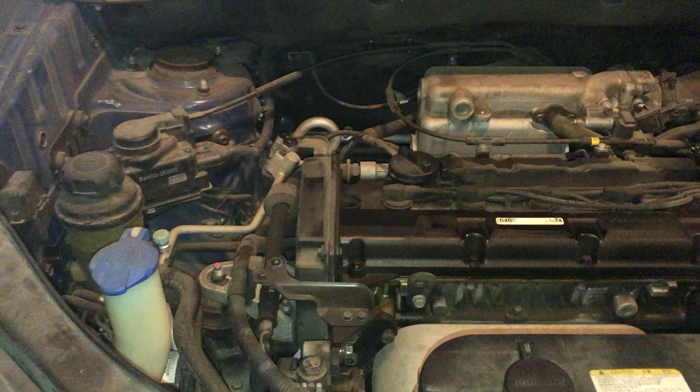I just wanted to make a video to show how the belts work on an 06 Tucson, since I couldn't find any on YouTube when I started trying to change mine. I'm not a mechanic or an expert, just know enough to get myself in trouble. Let me show you what I found.

So this is the engine, the 4-cylinder Tucson with the top off, which makes it easier to see the belts. There are 3 belts: the power steering pump there, down there you can see the alternator, and assuming that's the water pump. There's a drive thing that comes off the transmission, and the AC one is way in the back, the hardest one to get to. That's the one I had to replace.

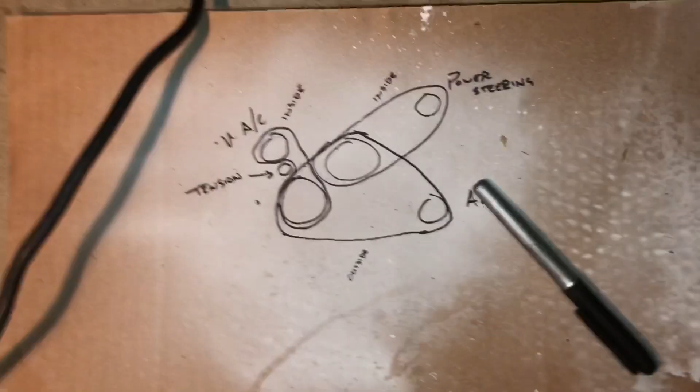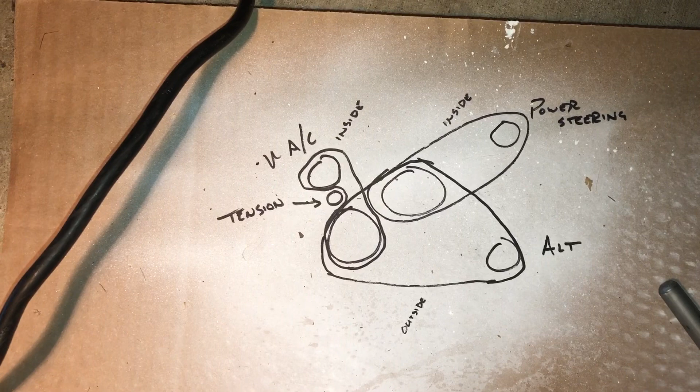All the videos I've seen suggest you make a diagram of the belts before you take them off. It's definitely a good idea to figure out how these things work. There are 3 belts, like I said. The 2 that go over the alternator and the power steering are both stretch belts, so you need a stretch tool to get those on and off. The one that goes to the AC is a standard one with a tension pulley.

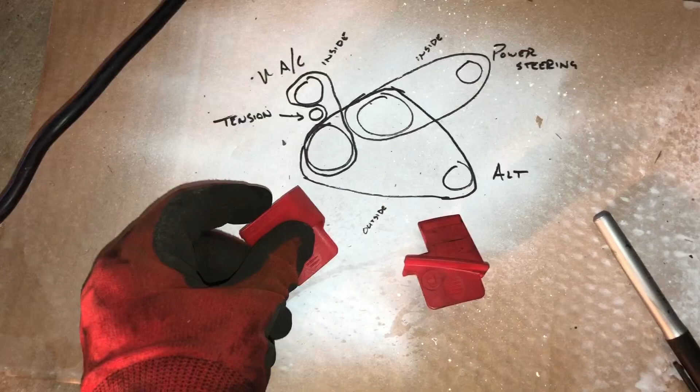As far as the stretch belts go, there's a tool that AutoZone has. It did not work for me. This one that O'Reilly has worked much better for me. You use this to slide it on, and this to slide it off. That's the one I'd say to use.

Let me show you on the side here. So you can take the top of the engine off, but I guess you don't need to - you can still get to things because you really just need to go on the side. You want to take off the passenger front tire, and behind that there's an access panel with 4 10mm screws on the side. You can take that off, and then you can access what you need for the most part.

So this is the drive piece that comes off the transmission, and this is the tension pulley. If you're going to take this belt off, note that you've got to take the stretch belt off for the alternator first, because the AC belt is behind the stretch belt here.

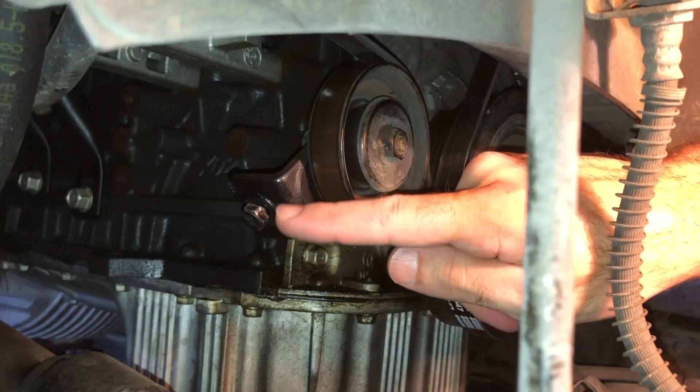Get around the side here. You can kind of see that this is the bolt that reduces tension on the tension pulley. You turn that counterclockwise to reduce tension - it's a reverse thread, if you look behind it, it makes sense. Counterclockwise removes tension. Pull this out, and then that belt will come off pretty easily.

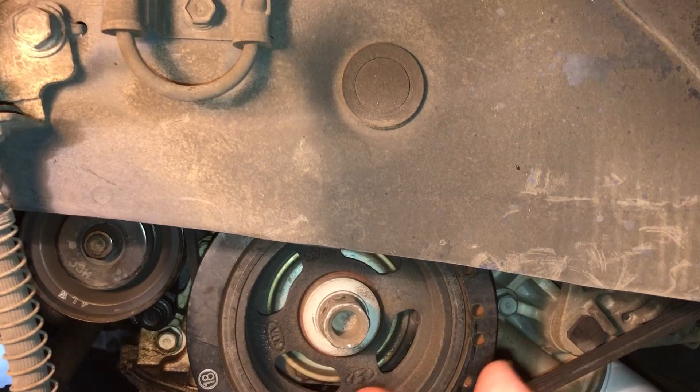Whenever you're getting these stretch belts on, you put the tool on there, and this guy's got a nut - I was using a 7/8 size to turn this. You'll turn them as you get the belt on to slip it on, and that's pretty much it. Look at other videos to figure out the right way to change things, because like I said, I'm no expert. But I wanted to at least document this for myself and for other people.

If you need to change this stretch belt for the power steering, there's a little guy you can kind of see it inside the wheel on the power steering pump there. That one seems to be - I was using a T55 Torx driver to turn that guy.

Yeah, so that's it. Hope it's helpful. Good luck.